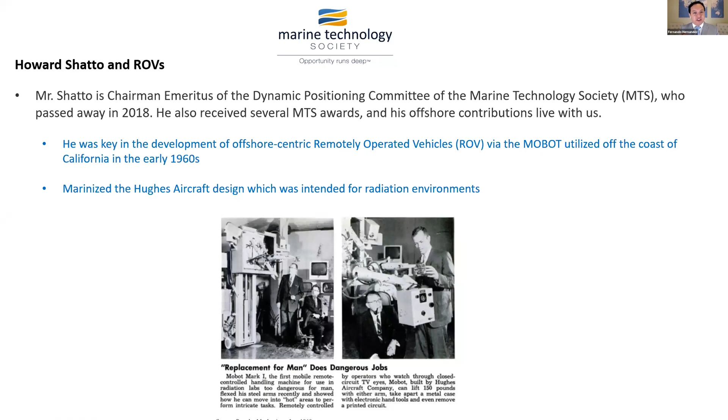And Mr. Shatto, if you look at these images here, this would be the genesis of what is arguably the first offshore specific ROV. That's the Mobot. It was used off the coast of California in the 1960s, and it was marinized by the Hughes Aircraft Design and used offshore, again, in California. So what we see a lot with offshore technology and subsea technology is that you have to marinize it. It doesn't just learn to become adaptable at 10,000 feet under the water. There's a lot of engineering and a lot of grit that goes into that, and we'll show what that actually

means. So what Mr. Howard Shatto originally created is the Mobot, which you see to the left, and it has a lot of the functions that current ROVs have, which is to be able to interface at the wellhead with the BOP, override, so on and so forth. And now we have the Gemini ROV, which was very recently released. If you see its manipulators, it's greatly advanced, but everything has a genesis, its historicity, and its roots. And the Mobot is just a really great design. And again, Mr. Shatto had a great and strong hand with that. He pursued the neutrally buoyant design, which we won't discuss here.

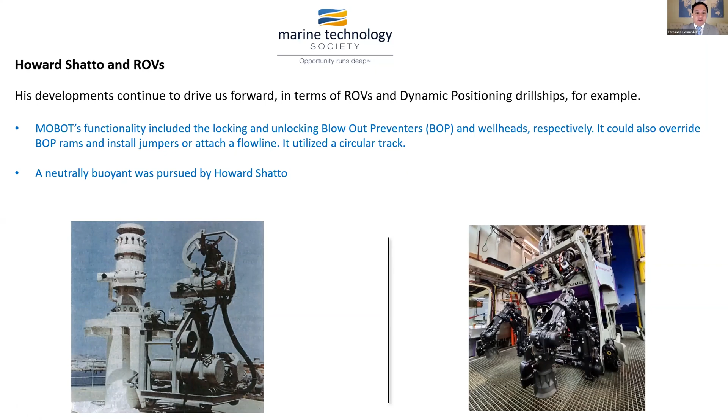But again, the fact that Mr. Howard Shatto is viewed as the father of dynamic positioning, had a strong hand with remotely operated vehicles, is the reason we are able to explore in deep water depths. And this is just really looking at the history of offshore technology, but also the people who played such a pivotal role. And Mr. Shatto, without a doubt, is such an individual. And as remarked by the drilling contractor, in 1970, he made industry history with SEDCO 445, which was the first dynamically positioned oil exploration riser-equipped drill ship.

And why does that mean a lot to me and to many that may be on here today? I've had the chance to be offshore on drilling and completion projects where you get to see ROVs, dynamic positioning, and all the magic comes together. So I hope this provided additional color to the technology conversation as to who we are as Marine Technology Society and the lineage with which we count on.

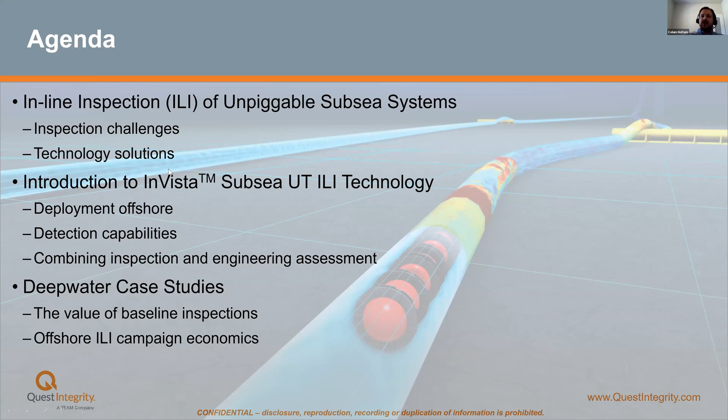I'll introduce you to Quest Integrity's technology. That's the InVista Subsea ultrasonic inline inspection technology. We'll look at how we deploy that system offshore, detection capabilities. We'll look at some real data. I'll make the case for combining inspection and engineering assessment together. And then finally, I've got a couple of case studies for you, two deep water case studies, one that demonstrates the value of baseline inspections, and another one that looks at inspection campaign economics. So we'll jump right in.

So what are the challenges that make a system difficult to inspect, or a term that is commonly used, unpiggable? Well, unknowns, older systems that were never designed to be inspected, missing information, missing drawings, potentially damage or restrictions in the line. Dual or multi-diameter lines, they're challenging. Wall thickness transitions, changes of ID, navigating cladded sections. We regularly have to navigate complex subsea infrastructure, so PLETs, PLEMs, jumpers, pigging loops if they have one, and then also navigating flexible pipe. We may have to go around reduced radius bends, either topside or indeed as part of the subsea infrastructure, for example, bypass piping.

We may have to navigate unbarred T's, Y's, reducers. There may be limited deck space to actually physically maneuver the tool. We often come across short barrel launchers and receivers. Sometimes there aren't any launchers and receivers at all. We may have vertical launchers and receivers. Launching ILI tools vertically and receiving them vertically is challenging. If we require topside or subsea modifications, they can require additional regulatory approval.

Physically having the lifting or rigging equipment to maneuver the tool, deep water assets, we're dealing with high head pressures, heavy wall thickness, small IDs. Single line tiebacks are challenging. Subsea tie-ins: what is the diameter of the line that we're dropping into? Where does that line go? Who owns it? And as I said, navigating flexible pipe, even if the focus of the inspection is a rigid

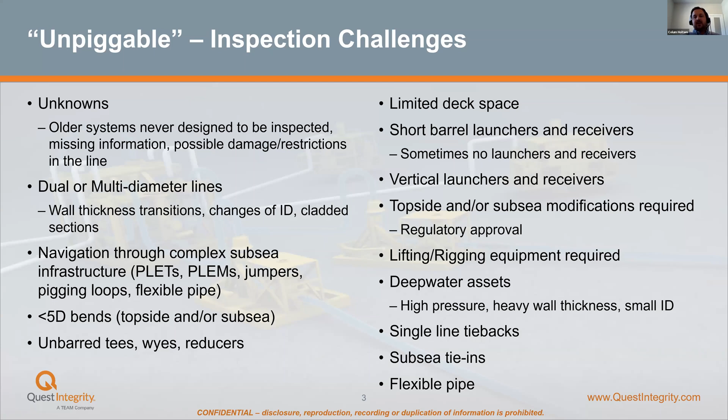pipeline system. So in the end, it really comes down to a matter of risk. So how do we get our tool in and out of the line safely? So they're the challenges. These are some of the technology solutions that we've engineered to overcome those challenges. And I apologize for the wordy slides. It's the most wordy slides. We'll look at lots of pictures after this, but I just want to run through some of these solutions and how we handle some of those unpiggable challenges.

So first of all, performance qualification testing. We want to reproduce the inspection challenges onshore in a flow loop to maximize the chance of first run success offshore. We don't want to be doing anything for the first time offshore. Lightweight tools with a small form factor allow us to hand carry our tools offshore, quick and easy mobilization on a helicopter. It also gives us the means to launch in existing short barrel launchers and receivers, or it makes it a lot easier to install temporary launchers and receivers if no barrels exist.

We want our inspection to be minimally invasive. We ideally don't want to make any topside or subsea modifications. We want to be easy to deploy, so hand launch the tools, remove the need for lifting and rigging equipment. We have the ability to launch both horizontally or vertically, and in general, no vessel support is required. Everything's just handled topside. We want to minimize production downtime. That's one of the roadblocks we come up against for inspection. We want short inspection campaigns.

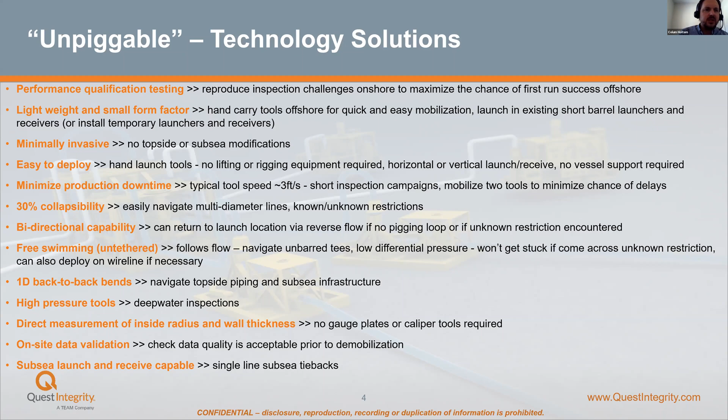We also perform data validation on site. So we check that the data quality is acceptable prior to demobilization. And this is a question that's come up more recently, but we're also subsea launch and receive capable. So that's a potential inspection solution, for example, for single line subsea tiebacks. So those are some of the solutions, and we're going to drill down on some of those in terms of how it actually works. So hopefully you can see this video. I'll just leave it running while I talk over this slide.

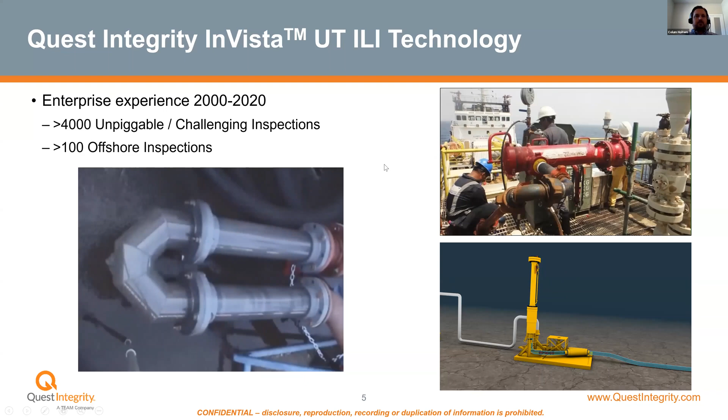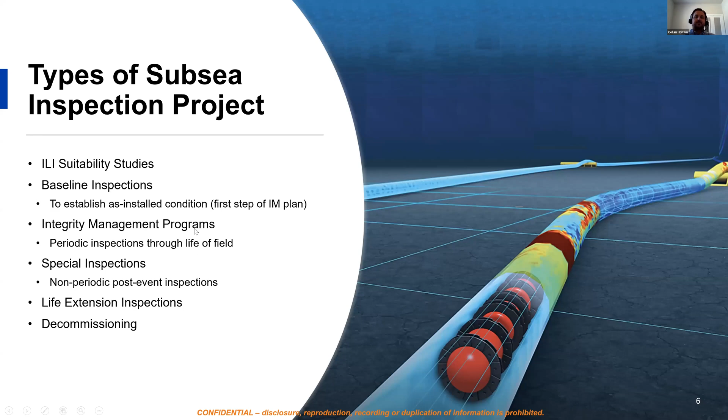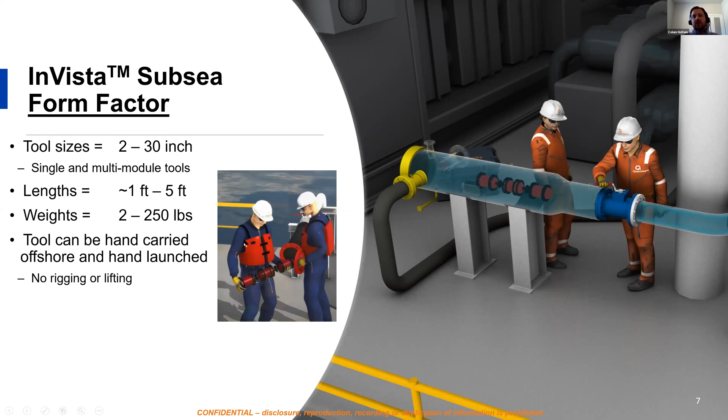In terms of tool lengths, anywhere from about a foot long up to around 5 feet in length, weighing anywhere from 2 pounds up to 250 pounds. And the point is that all our tools can be hand carried offshore and hand launched without the requirement for additional rigging or lifting equipment. So that's the small form factor.

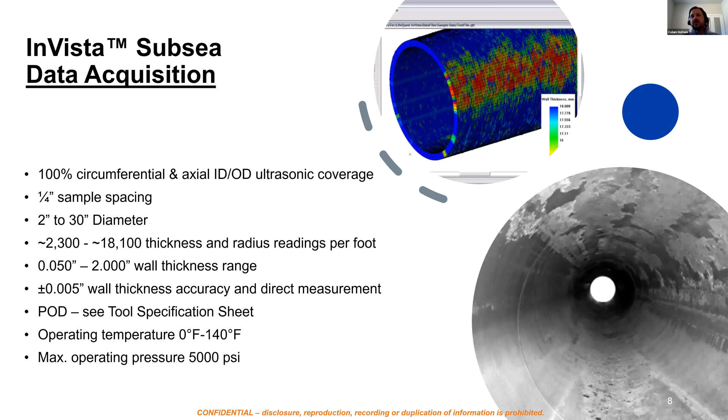And then driven by the industry, we developed a fleet of high pressure tools specifically focused on deep water and ultra deep water inspections that are rated up to 5000 PSI. So I mentioned at the start the value of combining inspection and assessment. So we try to do that.

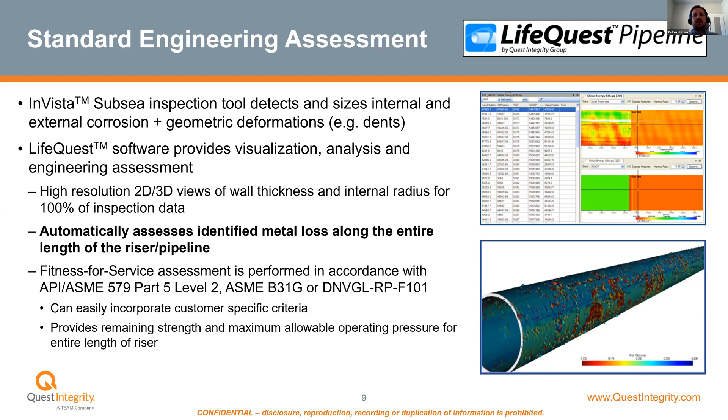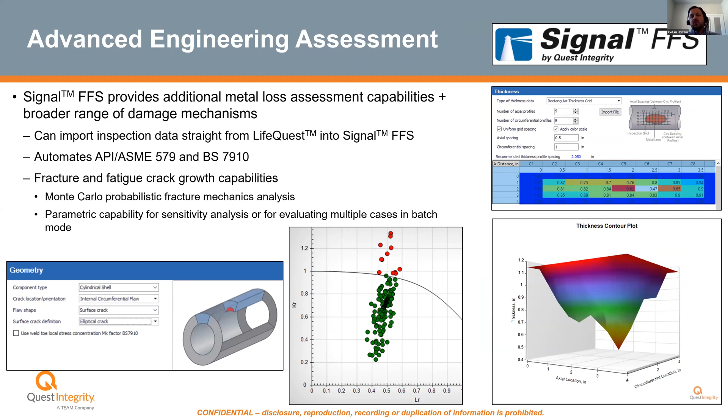Sometimes you may have more complex loading scenarios. You may have more advanced or more severe damage that requires an advanced engineering assessment. So in addition to the standard, we also have the means to export our data or import our data into advanced engineering software where we can perform either more complex assessments or elevate it to a level 3 type fitness for service assessment.

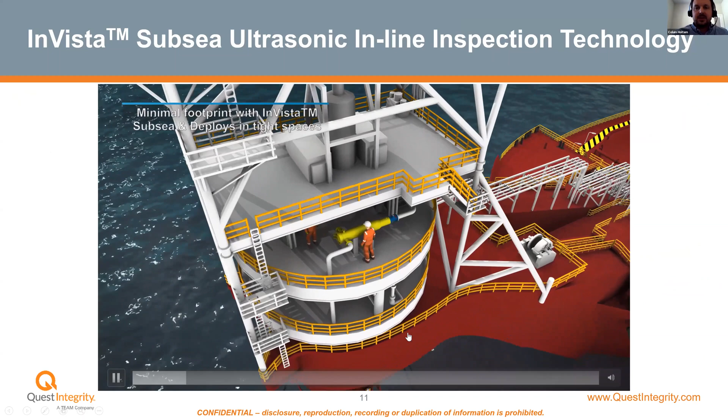Okay, so hopefully this works. It's a short animation. It's not the most exciting animation in the world, but based on our small form factor, the size of our tool, the weight of our tool, one of the challenging areas that we specialize in is where there's limited deck space and short barrel launchers and receivers. So one example of that is on an FPSO turret.

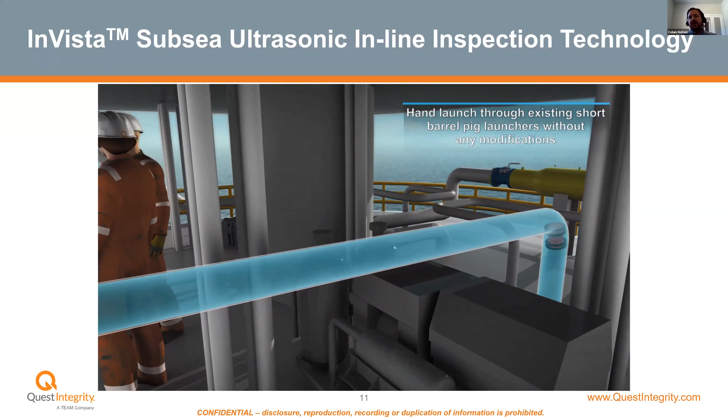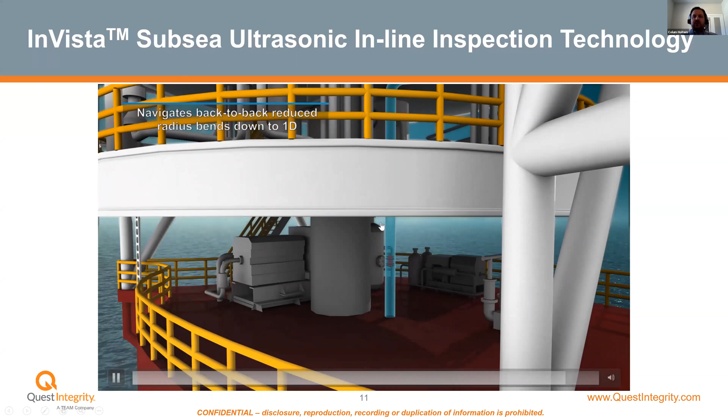So this is showing we launched in the existing barrel. We're using our single module technology. We're navigating reduced radius bends down through the turret before we get into the riser. So that's one example. Let me just jump to another one.

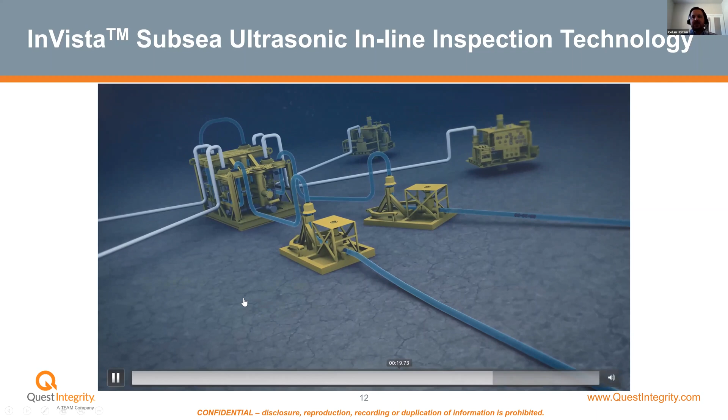This second example, pretty standard setup for a subsea pigging loop. So we've launched topside, down through the riser, flow line, PLET, rigid jumper. There could be wall thickness transitions, there could be clad sections, changes of ID, through the manifolds, around the pigging loop, and then back on the other side, jumper, PLET, flow line, riser, and then receive the tool again, topside. So that's the type of scenario that we get involved with.

In this instance, there was a pigging loop. I mentioned earlier that all these tools, you can tell they kind of look symmetrical, so they also have bidirectional capability. So in the absence of a pigging loop, as long as we can manage the flow appropriately, we can launch and receive in the same location.

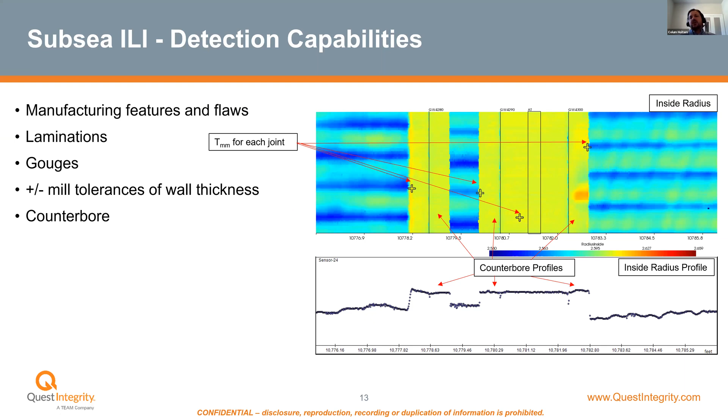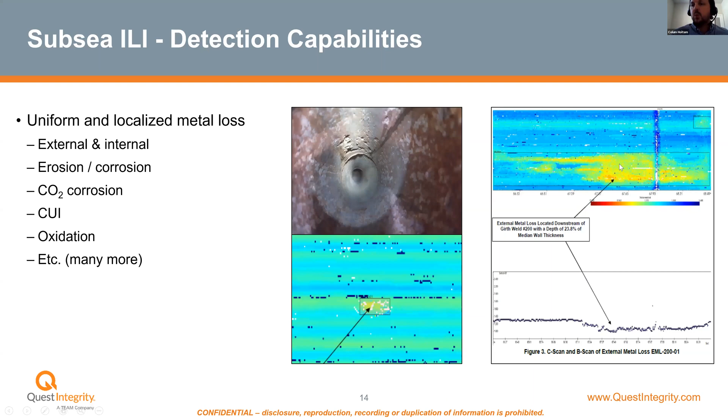The C scan on the right, this is actually a deep water riser. If you can imagine this flipped vertically, you see the mill variation in wall thickness. This is the girth weld, and then this greeny, yellow, red region, that's external corrosion at the splash zone. So for this particular inspection, we ended up with around 24% wall reduction in the splash zone of that riser.

Okay, another damage threat that we come across more regularly at the moment is related to acidizing treatment. So there's an increasing number of acidizing treatments used for well stimulation. The acidizing cocktails are HF and hydrochloric acid. They're very corrosive. They need to be highly inhibited to prevent corrosion.

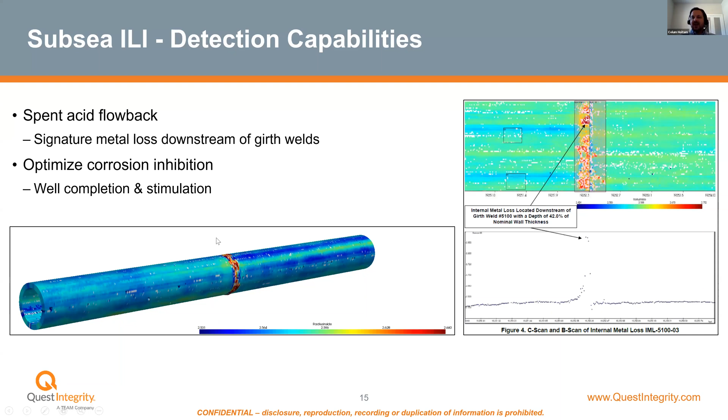This was a deep water inspection. You can see it's a heavy wall pipe, small ID. This is a girth weld, and then we see wall loss on the downstream side of the girth weld. So the well is at this end of the line. The platform is at this end of the line. And we've seen this on more than one facility, that if the inhibition is not controlled, then we can see this signature type of corrosion on the downstream side of girth welds related to acidizing treatments.

And then, as I said, we detect wall loss anomalies and also geometry anomalies. So we can detect, obviously, if it's less than roughly a 30% restriction. Actually, for our deep water tools, we're often up at maybe 40% collapsibility. So if we can navigate that restriction, we'll collect the data, and then we can perform an assessment on whether it's a dent, or we can detect ovality.

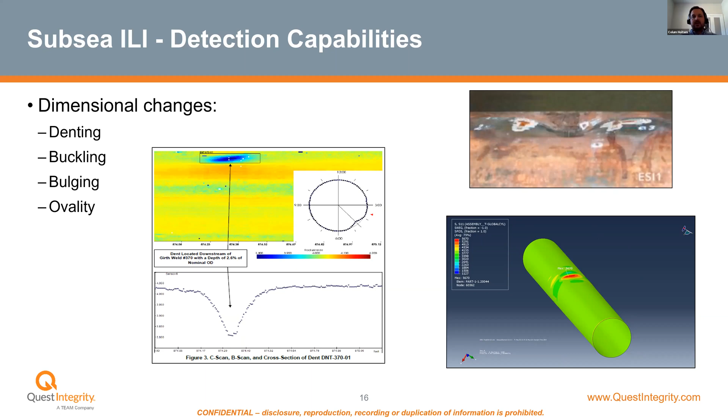And in the extreme, we can import that data into an FE model. This is actually an onshore example. It's a thin wall pipe. We can import that data into an FE model and perform, for example, a dent assessment based on the data collected from the inline inspection.

Okay, so we'll finish off with two case studies. The first case study is on the topic of baseline inspections and the importance of data repeatability. So this was a baseline inspection that we performed onshore on the stalks in 2016. So we were inspecting onshore prior to this line going into the water and seeing first production.

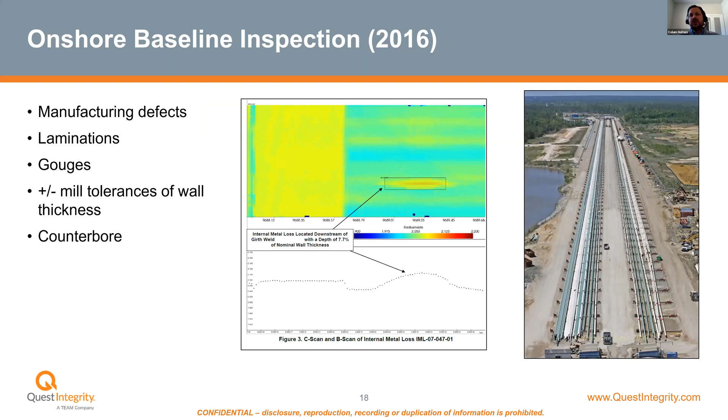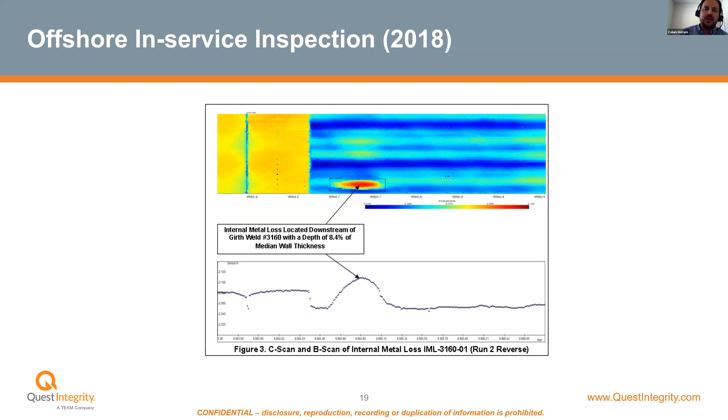But this is the same feature that we found onshore in 2016. We've now inspected and detected it again in 2018. The interesting part of this inspection was this was a bidirectional inspection. So we knew we were going to see this line twice. In actual fact, we ended up inspecting this line and gathering 4 sets of data.

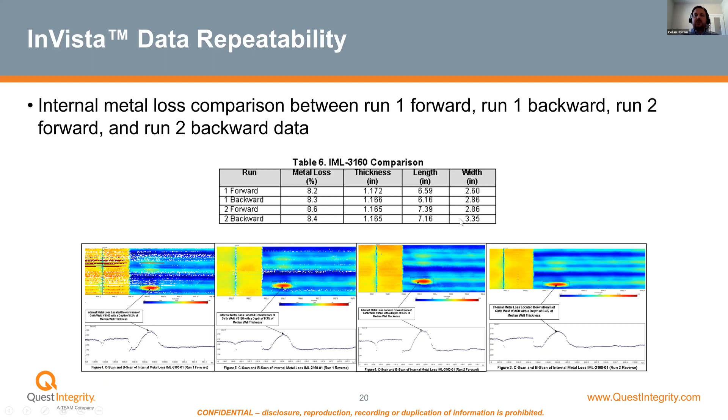So this is run 1 forwards, run 1 backwards. You can see we have some data drop out. There was then some additional cleaning. We then have run 2 forwards and run 2 backwards. So we picked up the same feature 4 times, and we were able to analyze that feature, and then we compared it with what we saw in 2016.

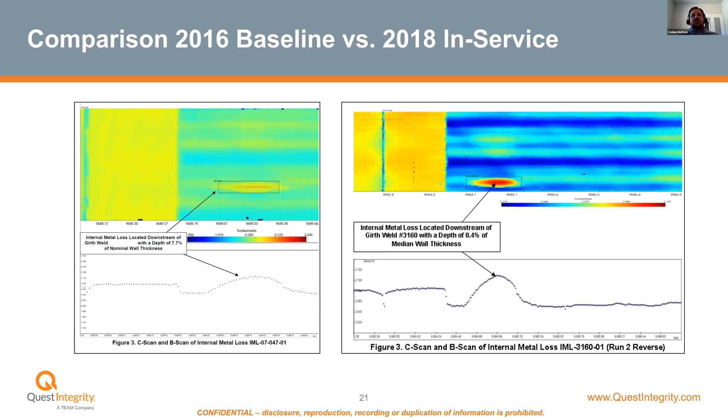So what we're looking for is any sign of growth, that feature is actively growing. And in this instance, once you factor in the sizing tolerance of the tool, this was concluded to not be growing. So obviously we saw it onshore, we knew it was there. We inspected it after time in production, it hadn't grown, and that will just stay there as a monitoring location. So that was where we actually had the baseline data.

The definition of baseline inspection is kind of loose. So I've shown an instance where we did it before that line entered service. That's perhaps the ideal scenario for a baseline inspection, but often it's just viewed as the first time you inspect that line. So in this particular project, this was a line we inspected after a period of production. So the line entered service, it produced for a relatively short period of time, then it was inspected, and that became the baseline inspection.

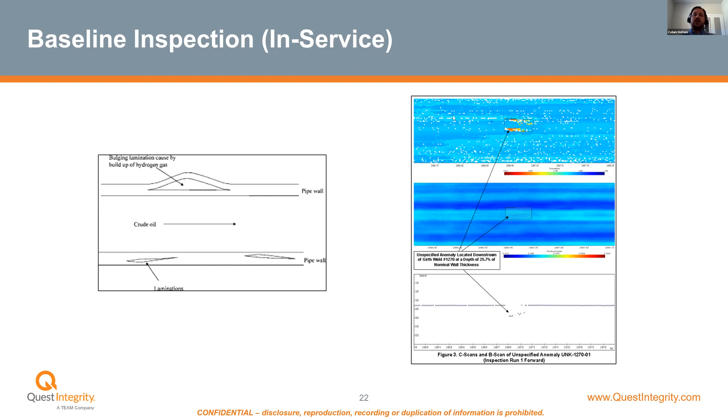So that raised a big red flag. When you applied some engineering judgment to this, you looked at the service the line had seen, it actually seemed unlikely that this was an actively growing external corrosion anomaly, but without the baseline fingerprint to compare it to, you really can't be certain. So the plan for this line was, it was obviously marked as a monitoring location. It was then entered back into service for a shorter inspection interval. So the first inspection was carried out in 2018, second inspection in 2019.

This is the 2019 inspection. We found the same feature. Again, considering the sizing tolerance of the tool, we were able to deduce that it wasn't growing. We believe it to be a manufacturing related flaw, and it will be kept in the integrity management plan as a monitoring location. So this just shows that if we'd had that fingerprint onshore, this feature potentially wouldn't have caused the heartburn that it did, and potentially could have avoided another inspection after only a short interval.

Okay, these are my last two slides. So this is just another case study. So this was a case study on ease of deployment being the key to regular inspections of deepwater risers, and that's one of the things that we're trying to make the case for to industry, that we're trying to make the tools extremely easy to deploy offshore.

So in this particular example, we inspected 4 ultra-deepwater production riser flowline systems. They were configured as 2 pigging loops. Water depth was actually around 7,500 feet. One loop was around 8 miles long. The other loop was around 11 miles long.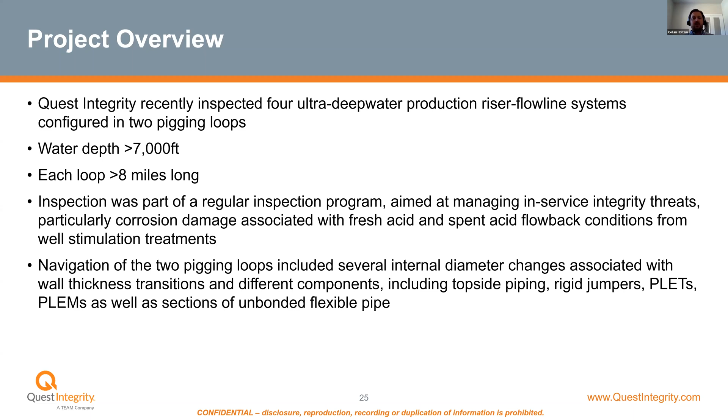The inspection program was part of just regular periodic inspection aimed at looking at in-service integrity threats, but these lines were seeing well stimulation treatment. So there was some interest in looking for acidizing corrosion. In order to navigate these 2 pigging loops, there were several ID changes, wall thickness transitions. We had reduced radius bends on the topside, and then in terms of subsea infrastructure that we had to navigate, we had rigid jumpers, PLETs, PLEMs, and then also sections of unbonded flexible pipe.

So these lines were previously inspected in 2017 by what I've called a conventional UT ILI tool. Topside modifications were required to get that tool in the line. Those topside modifications required regulatory approval. Launcher and receiver barrel extensions were installed in order to accommodate the size of the tool. Rigging and lifting systems were required to lift and launch the tool, and then temporary piping was installed to bypass 3D topside bends, so reduced radius bends topside.

The duration of that cleaning and inspection program was 25 days. That included 1 inspection run per loop, no on-site data validation, and 14 anomalies were detected, and then regulatory approval was required prior to returning that asset to service.

So in 2019, we ran that with our small form factor UT ILI tool. Because we could fit in the existing short barrel launchers and receivers, no topside or subsea modifications were required. We could fit in the launchers and receivers, and we could navigate the reduced radius bends. Tool was hand carried offshore and hand launched.

The duration of that cleaning and inspection program was 10 days. In that period, we ran each loop twice. We validated the data for each loop as being acceptable prior to demobilization. We detected 21 anomalies, including all of those found in 2017. And the final inspection and assessment report was delivered within 3 weeks for both loops.

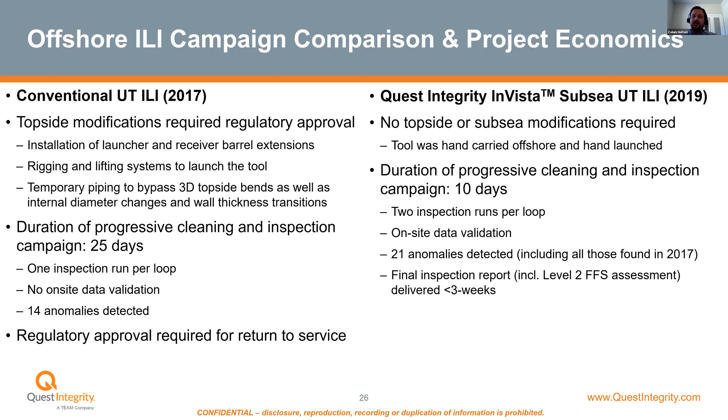Why do we want to do that? Well, really the main reason is integrity and reducing risk. So we believe in order to have the most effective integrity management plan, you need to inspect regularly. I referred back to a previous webinar on life extension at the start of my presentation. If you take that as the example, if you're able to inspect easily with a minimally invasive tool with short inspection campaigns, that encourages more regular inspection. More regular inspection, you combine that with your corrosion modeling, your analysis, we think that produces the most effective integrity management plan. And with that, I will close my presentation.